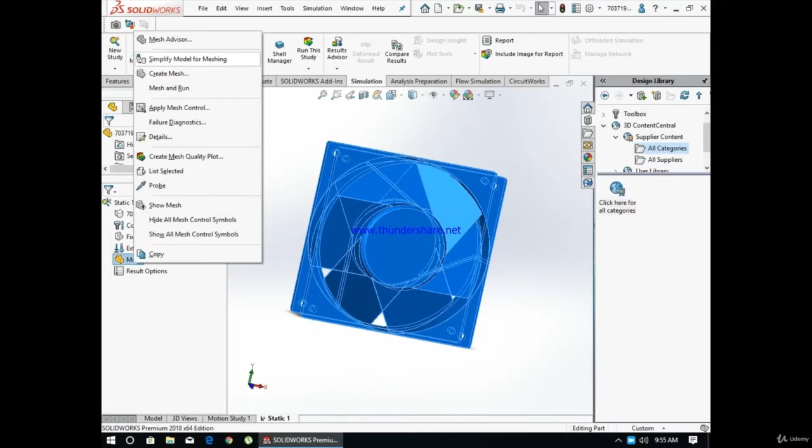You can say it is the foundation of getting the desired result you want. If you want an accurate result, similar to real life conditions, you need to mesh the surface, mesh the body properly. So it depends upon all the loads and whatever fixtures, constraints, whatever you give.

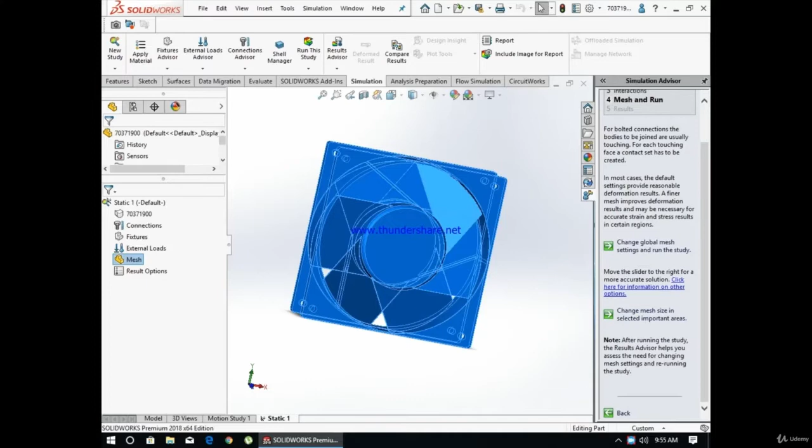You can see here I have opened a simulation advisor. SolidWorks has a native simulation advisor, used for beginners who don't know the concept of simulation. You can just go to simulation advisors, and all the properties present there will be given there. So it will be under new study.

You can go for study properties, and before that you will have the simulation advisor. So you open this thing. It is like just a help concept.

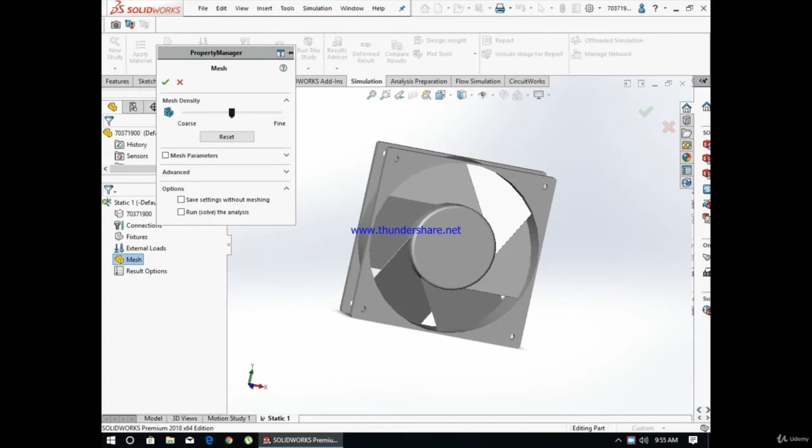Now I'm going to show how to create a mesh. There are two options here: coarse mesh and fine mesh. Coarse mesh is a very big, rough mesh, and fine mesh is, as the name suggests, a very thick mesh. So given coarse mesh, the SolidWorks software just ignored it.

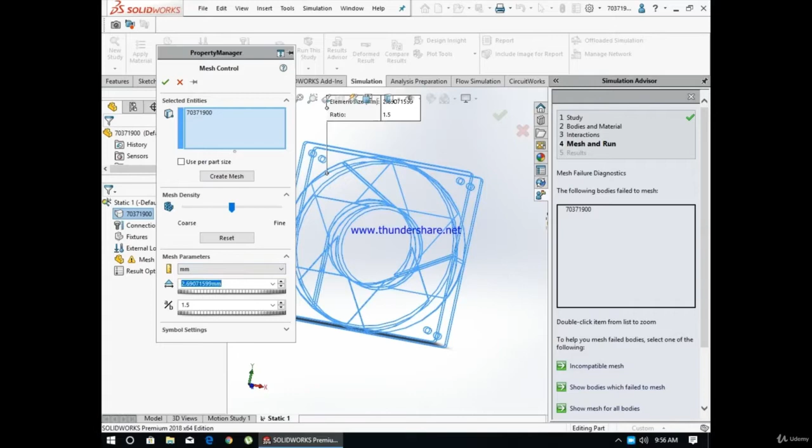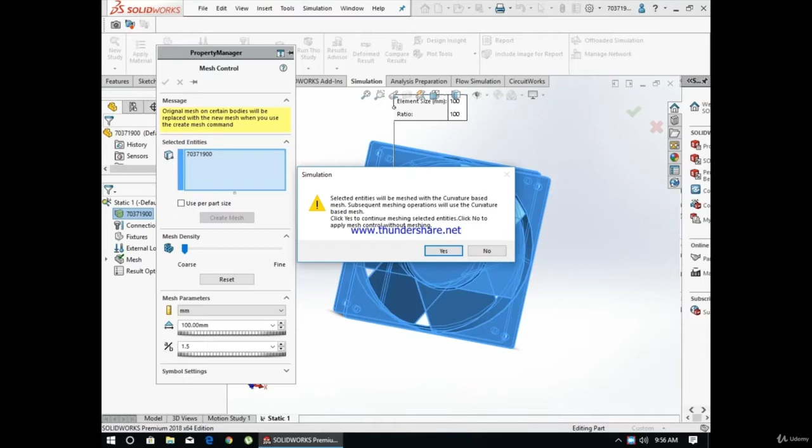Now you can see I'm giving different element sizes. Element size is also an important concept in meshing. It is nothing but the distance between the meshes, the distance between the elements and the nodes. What elements and nodes are, I'll discuss in later videos.

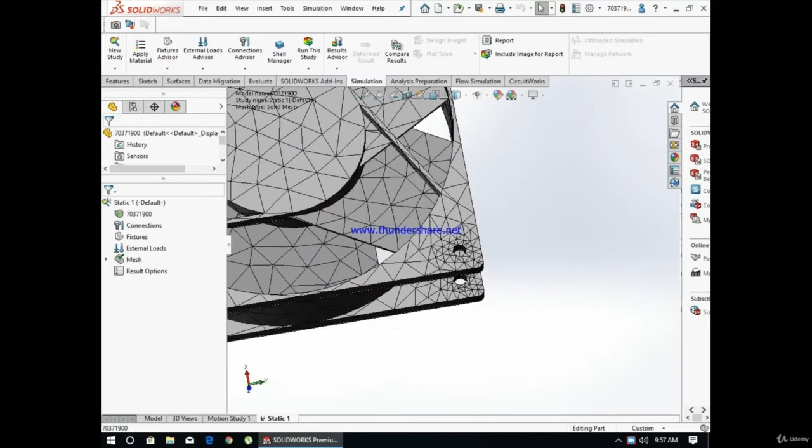You can see here the mesh at the end, the mesh at the center of the body, and the mesh at the hole is much different in curvature. That is because SolidWorks understood that at the holes there will be a very high stress concentration, so the stresses will be very high at those holes, and it automatically gave a finer mesh to get the most accurate results.

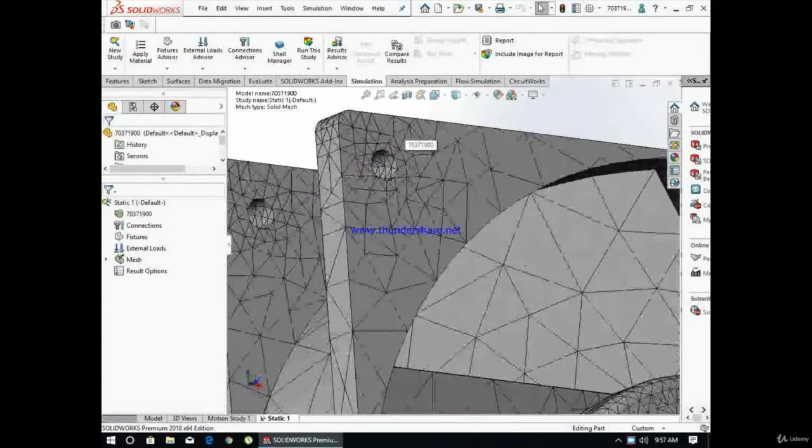It knows that at the center or the flat faces it's not that much required to find the accurate stresses, but at the holes it is very important. As you can see, at the middle we have fillets and smooth curvatures, so at that area also it has given a very fine mesh. It understood that those parts will be very important according to the user.

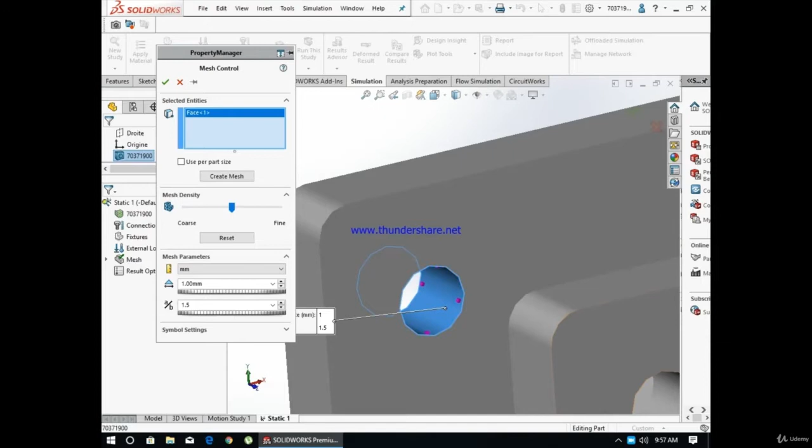So you can see I can give a much smaller element size. I am trying a much smaller element size than the previous default one. You can see it is simulated, with 3 or 4 dots there, which indicates that mesh control has been applied.

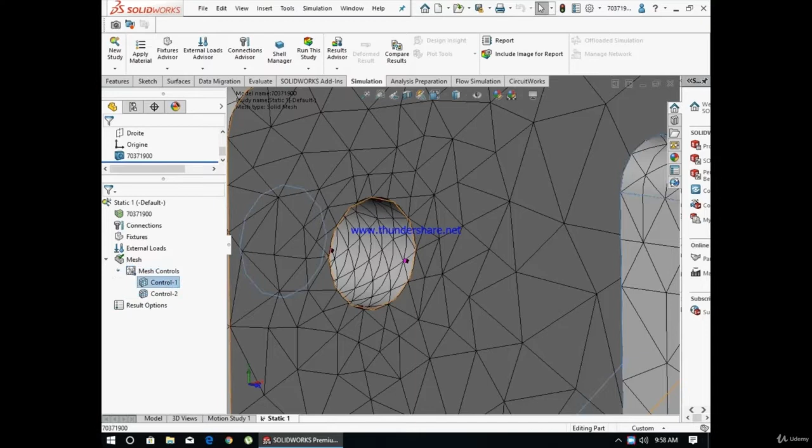If you go into the mesh and use controls, you can give a mesh control at different parts of the materials of the body. Not every time will the whole body be of use. Sometimes we require only a few parts or places to have much importance, so you can get much more accurate results at that moment.

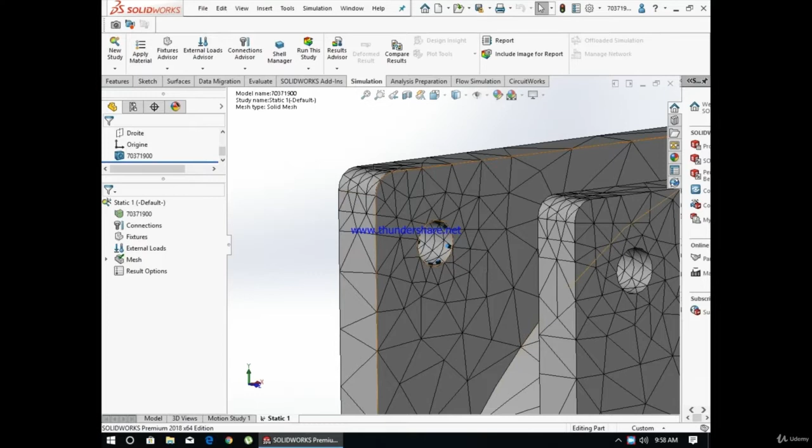So you can see there, compared to the previous hole, this hole is having much finer mesh. I'm experimenting a little bit, decreasing and increasing the size of the mesh. You can see that I have given 1.00 mm. Now I'm going to give a very finer mesh for you to see.

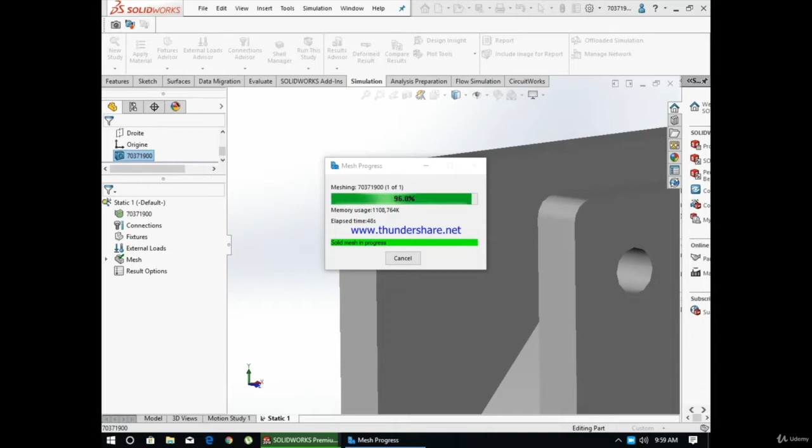I will give at the edge, where there is smooth curvature, an element size of 0.01 mm. Previously it took 2 to 3 seconds for the mesh to apply, but now 10 to 15 seconds have passed and the mesh has not been created. Let me fast forward this a bit. It will take around 50 seconds to 1 minute to create the mesh. As you can see, almost 50 seconds have passed, but still the mesh has not completed. So an error has come, saying that the mesh entity is much bigger than the fillet, so it is asking us to increase the mesh element size. The curvature was much smaller than that.

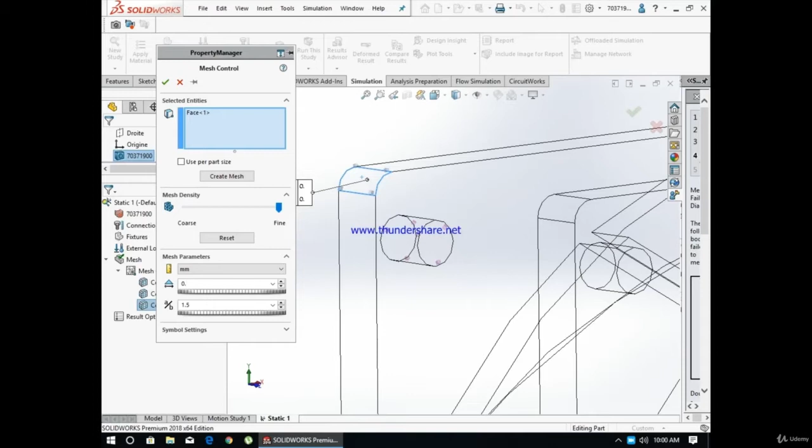So I'm going to give 0.1 mm instead. Let's see what happens. As you can observe, a lot less time has been taken, and you can see the difference between the hole and the fillet. This is how you can set your element size—you want a very accurate result at the corners rather than the other parts of the body. The finer the mesh, the more accurate the results.

Now I'm going to show you the mesh details. Here you can check the element size, mesh quality, how many nodes there are, and how many elements there are—all those details relating to the mesh.

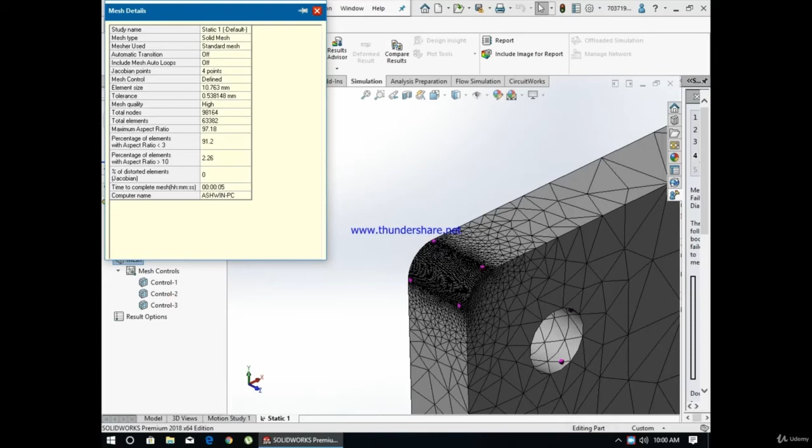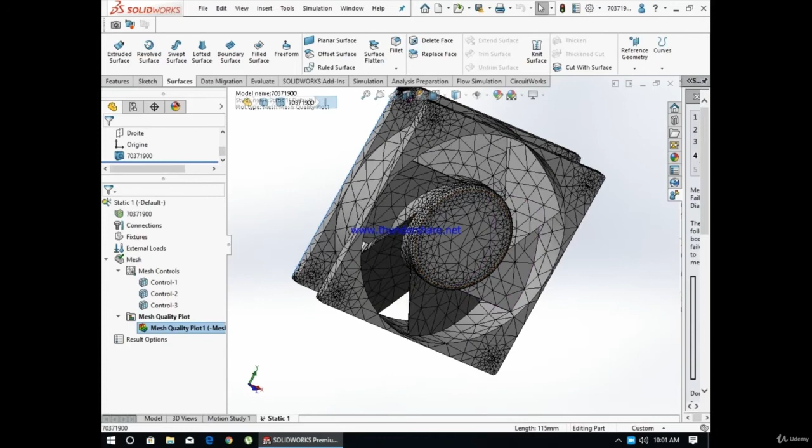Now I'm going to show you the mesh quality plot, so you may create the mesh accordingly. These things are important when you're working on a project—you can show what the quality of the mesh is, where you will give finer meshes, and where you can give very coarse mesh.

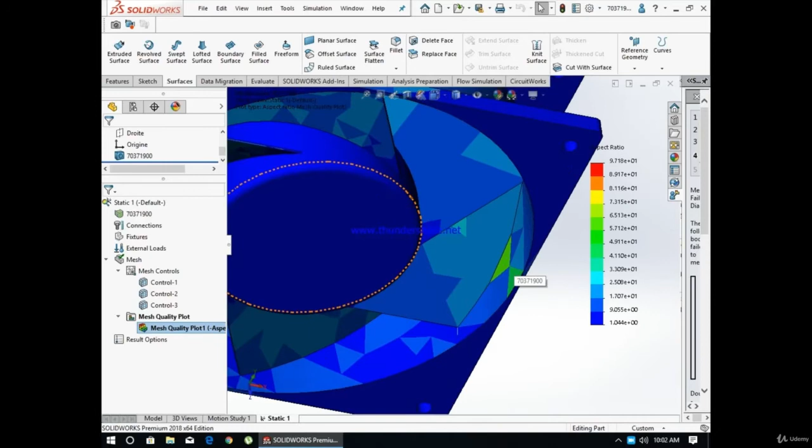You can show this in the form of an image, with color coding. I'm showing the aspect ratio here. There are different options—you can give aspect ratio, mesh, and Jacobian points as well. Now I've given aspect ratio, and it shows a color indication, with some values also given below.

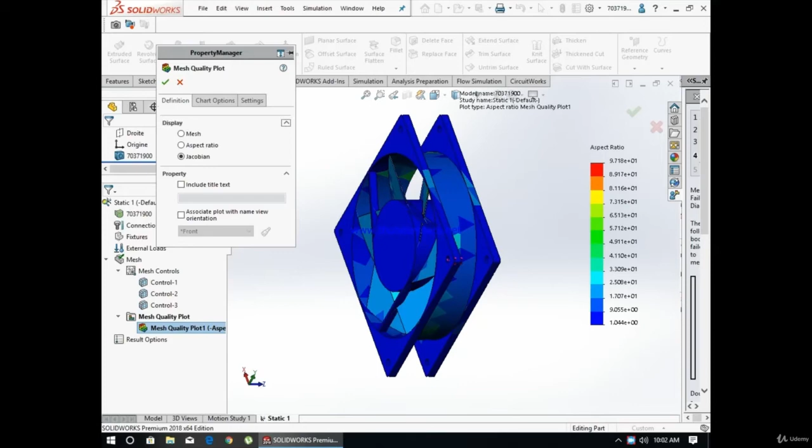So it basically represents the mesh in the form of a color image, and you can show the different mesh sizes. Now I've given it in terms of Jacobian, and you can see different things there. You can also do color settings, and set the mesh parameters in terms of mm, centimeters, or whatever units you want.

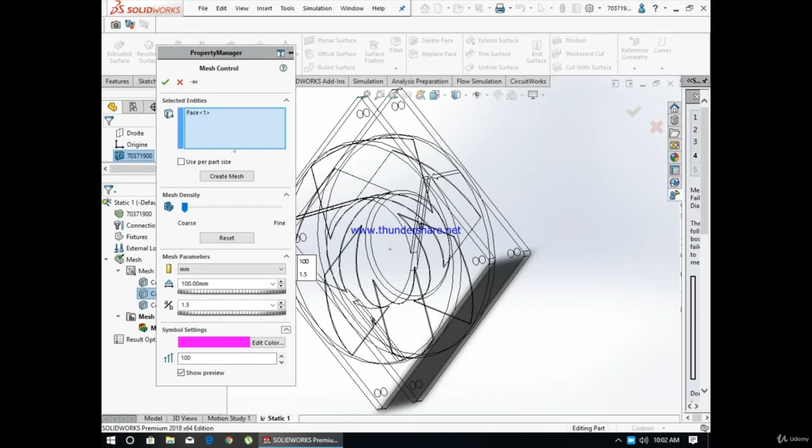So this is a brief introduction to meshing. We'll talk about meshing in a lot more depth later.

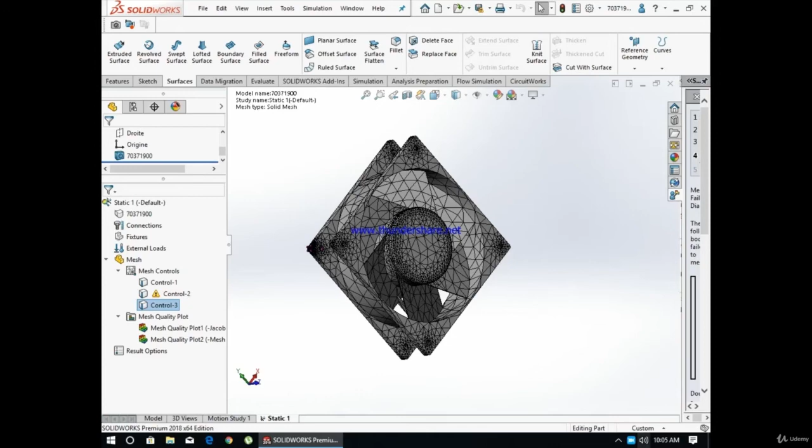Now we are going to see another example. Just wait a few seconds while I unsuppress all those things—some errors have occurred here. So here you can see another example with a different setup. I'm going to create a mesh for this one as well, specifically for the gears—bevel gears and so on. You can see there is a straight-type bevel gear here.

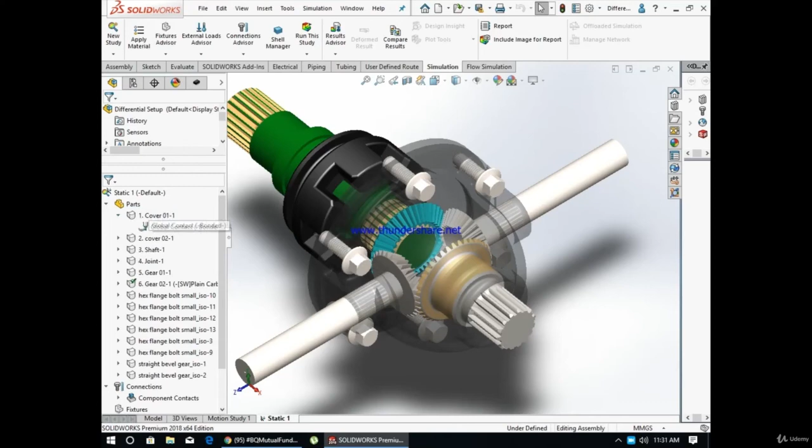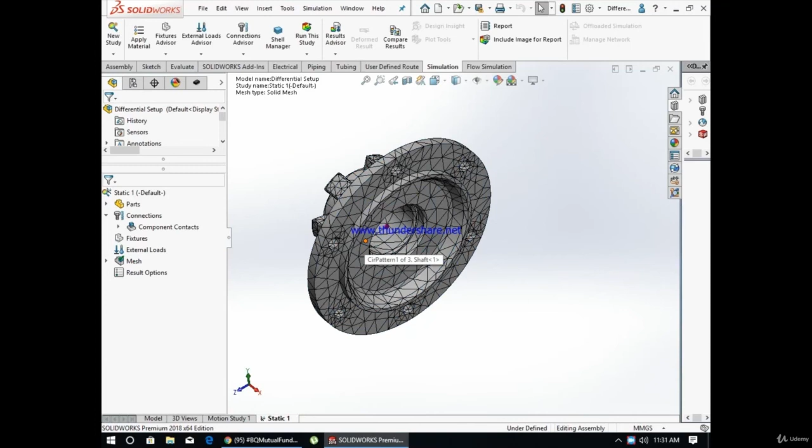I'm going to apply a mesh, and make some adjustments here, then create the mesh. I'm showing how the mesh element looks. Now it's also showing us the option to create curve-based features. You can see a basic mesh has been created—this is for a shaft, and you can say it's the body of the gear. I'm increasing the size, and you can see the difference for the whole element.